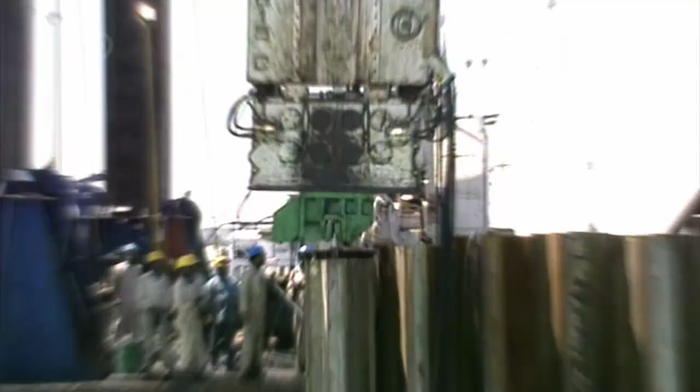Sheikh Mohammed bin Rashid Al Maktoum, Dubai's crown prince, is the visionary behind this amazing building. The project is his response to the economic time bomb his country confronts, as his close advisor, Sultan bin Sulayem, knows all too well.

He knew that we don't have oil. He knows that oil is going to end someday. And they have two choices. Either go and do something about it and find other alternative ways to sustain the life for the people of Dubai, or sit waiting for help.

Only 50 years ago, Dubai's a dusty backwater, home to pearl divers, coastal traders and Bedouin. Then, in the 1960s, prospectors discover oil. The sudden injection of billions of petrodollars transforms the sheikhdom. But geologists predict the oil boom will be over by 2016. The good life could end just as quickly as it began, when the wells run dry.

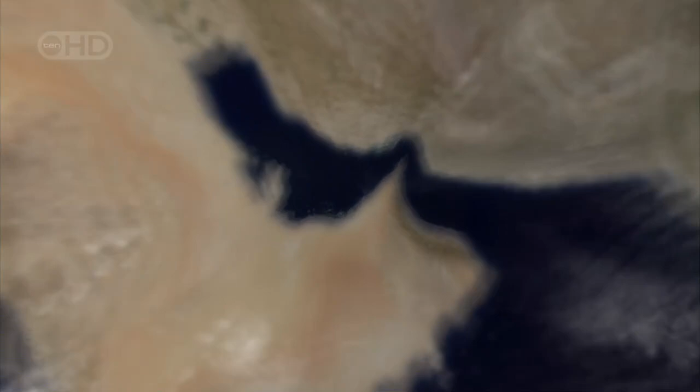The answer to Dubai's economic survival lies in its geography. This tiny emirate, less than twice the size of London, is in the remote Arabian Gulf. But Dubai has three untapped assets: sun, sand, and sea. Facing future economic meltdown, Sheikh Mohammed makes a crucial decision.

He will turn his country into one of the world's most exclusive holiday destinations, a playground for the rich on the Arabian Gulf Coast. The Sheikh needs a luxurious centerpiece to launch his country into high-end tourism. He stakes what some speculate as over $1 billion on the tallest, most lavish hotel in the world, with a unique 7-star reputation, the Burj Al Arab.

I think it was very important to put Dubai on the map of the world. There's no hotel like this hotel. It takes guts, and Sheikh Mohammed has a lot of guts. The Sheikh's courage is clear from his choice of architects. A radical young team from Britain, brave enough to take up the challenge, but very short on experience.

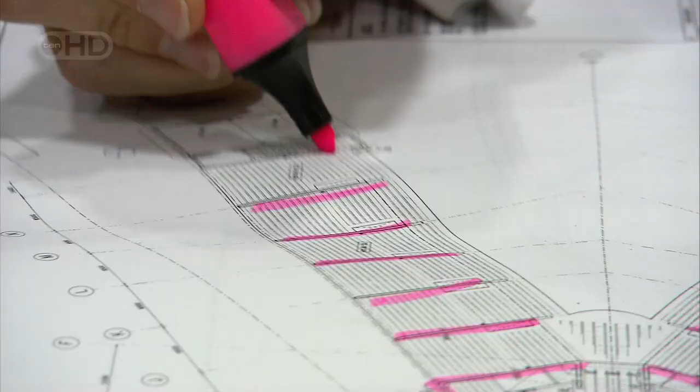They are led by Chief Architect Tom Wright. We had an average age of 32. Not a grey hair between us. And none of us had gone over about 15 stories. I was quite staggered by the scale and the immensity of the project. Tom Wright and his colleagues have a reputation for innovative engineering, but they're more used to designing schools and offices.

But Dubai is a place where connections can make all the difference. Through a contact in the ruler's office, the team gets its break. Sheikh Mohammed agrees to a meeting and is so impressed with their initial concepts, he awards them the contract. Now Wright must turn his sketches into a design so remarkable, the building becomes a world-renowned landmark. We had many sleepless nights worrying that the building we'd designed wouldn't turn out to be at all iconic.

Wright knows he must push his design to the limits. A building only becomes an icon when its form is simple but unique. We decided that if you could draw a building simply with a few strokes of a pen, and it was instantly recognizable as not only the building, but the place, Dubai in this case, you'd created something that was iconic.

So if you consider these buildings in the world, there are probably no more than 10 maximum that have actually achieved this status. Australia, Sydney Opera House. As with all these buildings, it's usually just the first couple of lines that actually make you know exactly where the building is. Paris. And you have to put a flag on the top. Can Tom Wright and his team compete with the likes of Gustav Eiffel? This is a once-in-a-lifetime challenge.

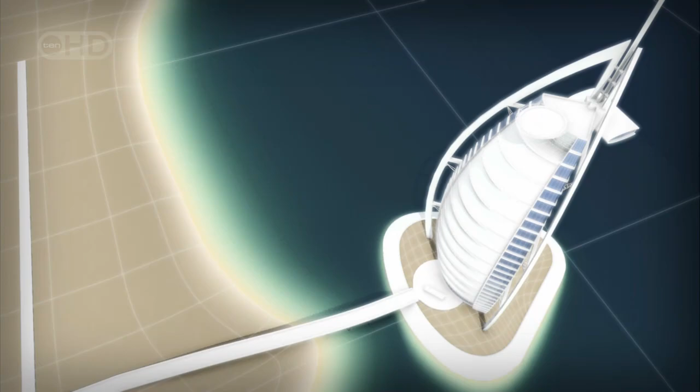Constructing the hotel out at sea will significantly add to the risk and cost. Can Wright persuade his colleagues this radical scheme will work? I remember I was pulling the sail out to sea, and the rest of the design team were pulling the sail back onto the shore. And this continued to go backwards and forwards before finally the client stepped in and said, no, it's going to be out at sea.

Sheikh Mohammed is prepared to take the risk. The hotel will be built 270 meters off the coast. No one has ever built a skyscraper this high on an artificial island. This 321-meter structure, weighing 250,000 tons, will need to stand firm against earthquakes and Gulf storms. Wright has won the first of many battles. The Burj will rise out of the sea. But time and again, his refusal to compromise will force his colleagues to push the boundaries of engineering to the limit.

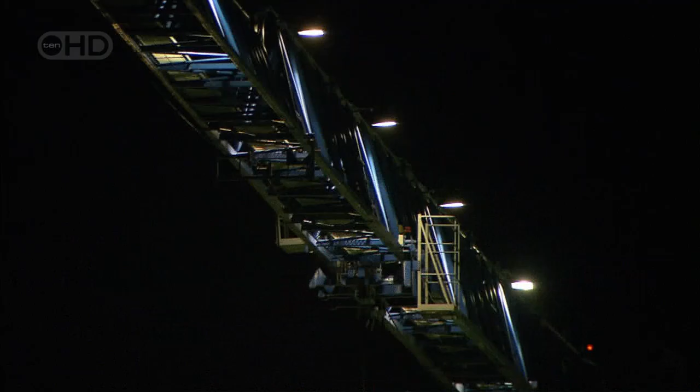By early 1995, the construction team is hard at work on Phase 1, building a low-lying island. But the inexperienced architects are about to get a taste of Dubai's extreme weather. April the 27th, a powerful storm known as a shamal sweeps across the Gulf, hitting the coast with a vengeance. A set of construction barges lie in its path. Each is laden with 10,000 tons of rock. The architects have planned for all weather conditions, but the storm's intensity still shocks Simon Crisp.

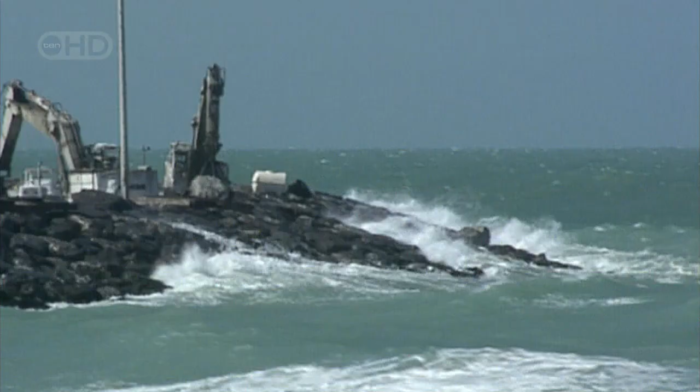We had 3 or 4 metre waves bashing onto the beach. To see the waves coming in like this was really quite a wake-up call for us. One huge barge breaks loose and slams into the mainland. The team realizes the damage this kind of storm could inflict on their island hotel. We had a really graphic example of how powerful the Gulf of Arabia can be when it's angry. The architect's decision to expose their structure to these forces could have serious consequences. The engineers will have to struggle to produce a low-lying island capable of resisting nature's fury.

The man-made island for the world's tallest hotel has hit a critical stage just 5 months into the build. Dubai's Sheikh Mohammed is depending on this project, the Burj Al Arab, to convert his country from oil producer to top-class tourist destination.

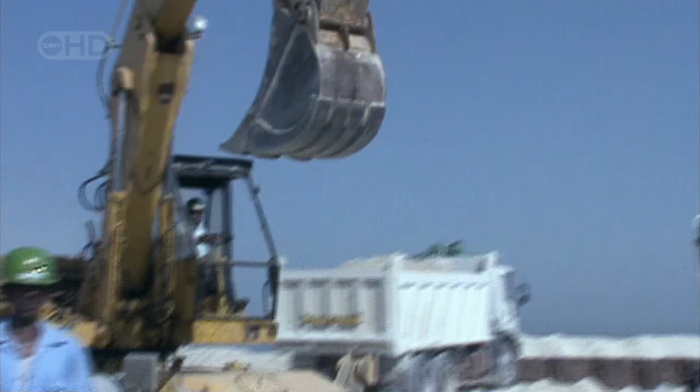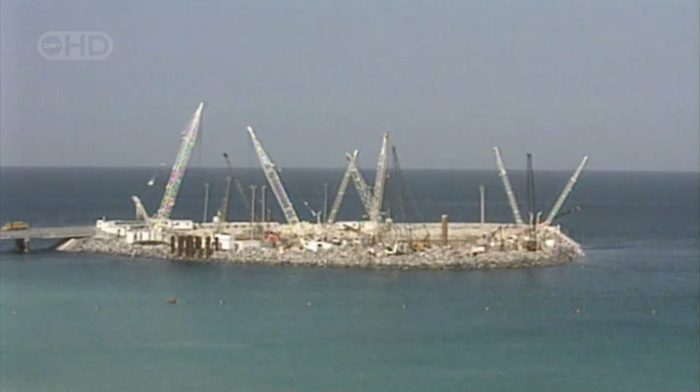But a debate rages over the island's height. Architect Tom Wright wants to make it low to give the impression of a sail rising out of the water. We argued a lot about the height of the island. From a design point of view, I wanted people to be close to the sea. From the start, he's gone head-to-head with engineer Mike McNicholas, who's responsible for the island's safety. So I wanted the island as low as you possibly could, you know, skimming the sea. I'm coming from the other end, needed to make sure we were protecting the island. McNicholas's worst fear is that waves breaking over the island could damage the hotel or even drag guests into the sea.

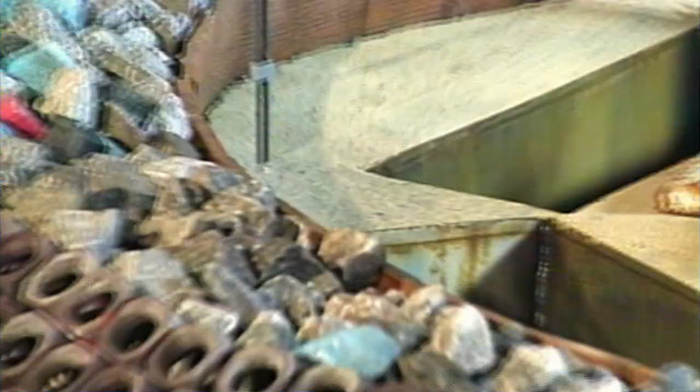Initially, the engineers planned to build the island using rocks. They are available locally and the technology is proven. But Wright rejects this. A rock island would have to be far too large to repel the sea safely. To keep the island low, McNicholas experiments with pioneering concrete blocks designed to reduce the impact of waves. But no one in the Gulf has ever used these blocks before. I had to insist with the team that we carried out tank testing. It was the only way we were going to be sure that the island would be safe. These tests replicate the power of the tallest waves that can occur once in 100 years and send them crashing into a series of differently configured models.

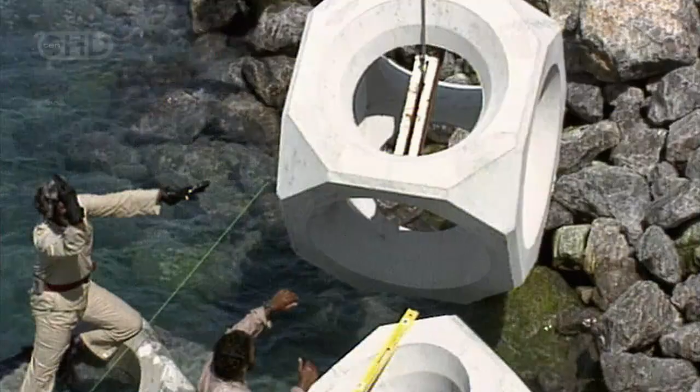3 weeks of testing prove the hollow blocks will work. The construction team builds the island with steep rock slopes, then covers them in concrete armor to absorb the force of the waves. These ingenious blocks work like a sponge. As the wave hits, the water passes inside the space and turns around on itself. The force is largely dissipated. With the engineers' help, architect Tom Wright has won his battle for a secure island that rises only 7.5 meters above the waves.

Now the team begins the second stage of construction. In the center of the island, construction workers drive huge lengths of steel 20 meters into the ground. This creates a triangular steel wall known as a cofferdam, which will become the outside of the hotel basement once they excavate the sand from inside.

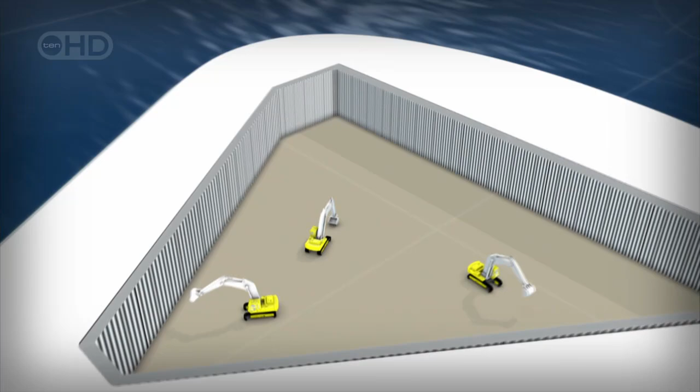But removing the sand could be dangerous. That was a real challenge for us. It's sleepless days and nights, 7 days a week. How we were going to stop the seawater coming into the structure, how we were going to stop the seawater coming around our structure from beneath and flooding it.

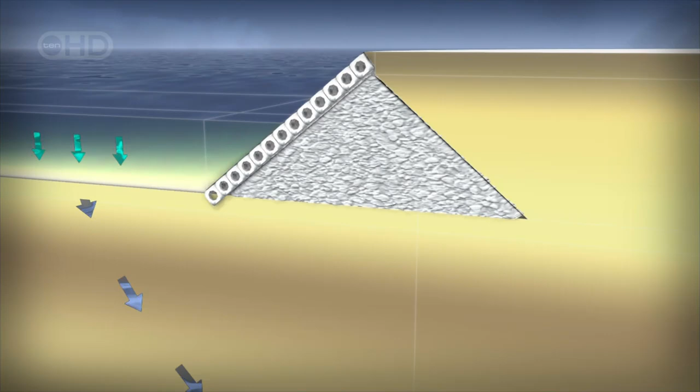The weight of the sea is a huge force on its bed. This pressure forces water through the sand and threatens to flood the artificial island from beneath. To keep the sea out, McNicholas injects liquid cement into the sand to seal off his steel wall from below. But as the sand is removed to form the basement, there's less and less weight to hold back the force of the sea. The cement seal is going to be tested to the limit.

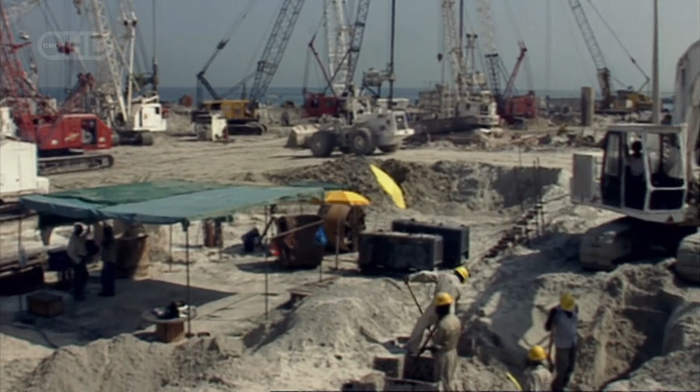In the worst case, the pressure caused by that water movement could have blown the whole bottom of the excavation like a champagne cork. If McNicholas's calculations are wrong, the excavation could be swamped, killing hundreds of workers. But he stands by his design. With the cement seal in place, the excavators begin to remove the sand.

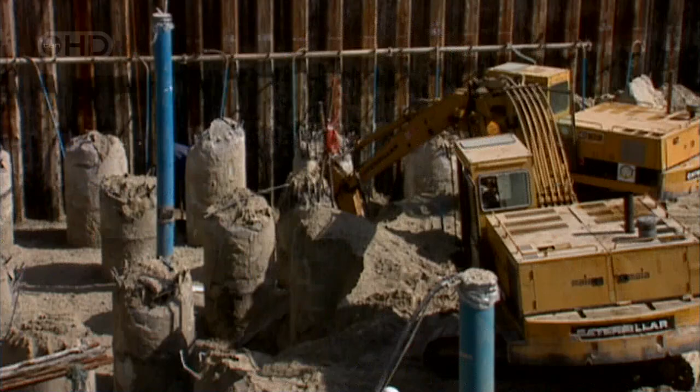As the man responsible, he's not going to let the workers face the risk alone. I felt I had to be one of the first guys down at the bottom of the excavation, looking up 10 meters above myself, thinking, each side of this cofferdam is 7,500 tons of sea pressure pushing in. When put to the test, both wall and seal hold firm.

And one of the probably proudest moments of my career was being stood on that excavation and looking around and seeing the steel wall there surrounding me and thinking, we are holding back the sea. My design worked.

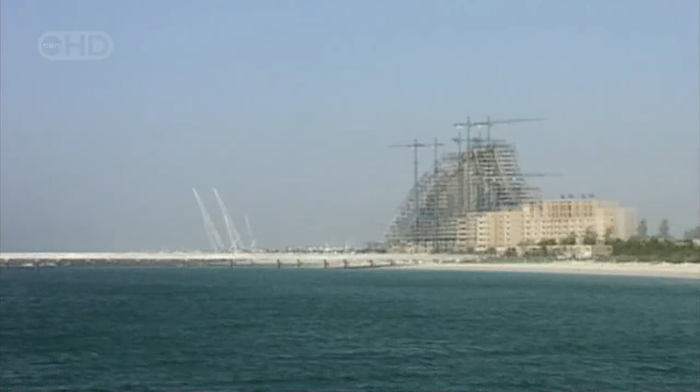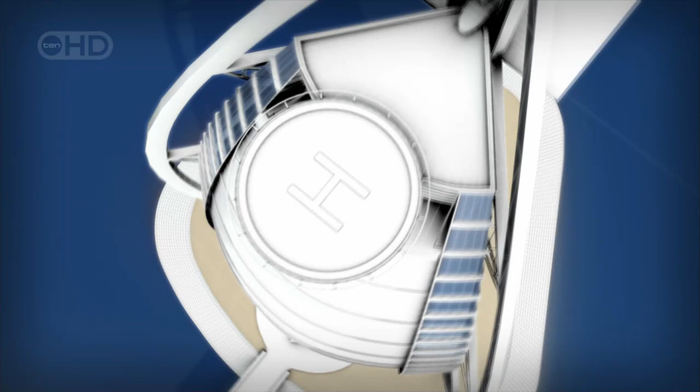November 1995. The artificial island for the tallest all-suite hotel in the world is now complete. The construction team starts phase 3 of this one-off project, the foundations. The support needed for any skyscraper is vast. But the location of the Burj Al Arab presents an added challenge. It had never been done before to build something like this on reclaimed land. I mean, we're talking about a 300-metre high tower on a man-made island in 6 metres of the Arabian Gulf.

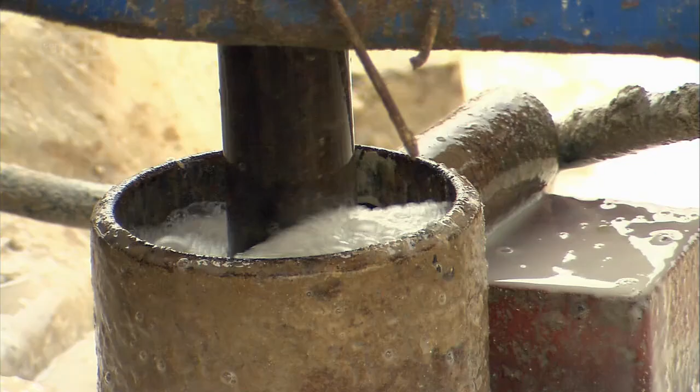The problems multiply when the results of earlier core tests reveal bad news. The team searching for bedrock drilled deep into the seabed. But even a full 180 meters down, there was no solid rock. This will make their job tougher, but the architects remain defiant. The average person would think we're crazy to build something like this on sand, let alone out in the water. How will this 300-meter structure stand firm against earthquakes and winds of close to 150 kilometers an hour when its foundations depend on nothing more substantial than sand?

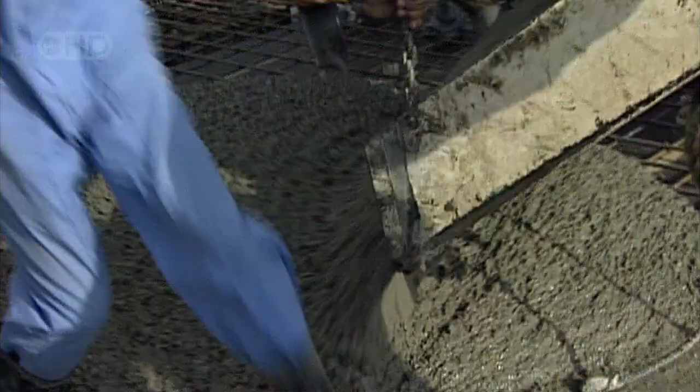On an artificial island 280 meters off the coast of Dubai, construction workers are preparing the ground for the tallest hotel in the world, the Burj Al Arab. But there's no bedrock beneath the site to support the foundations for a skyscraper. The architects have a plan. They want to support the Burj using steel-reinforced concrete foundation piles drilled deep into the sand. So, what's to stop the whole structure from just sinking?

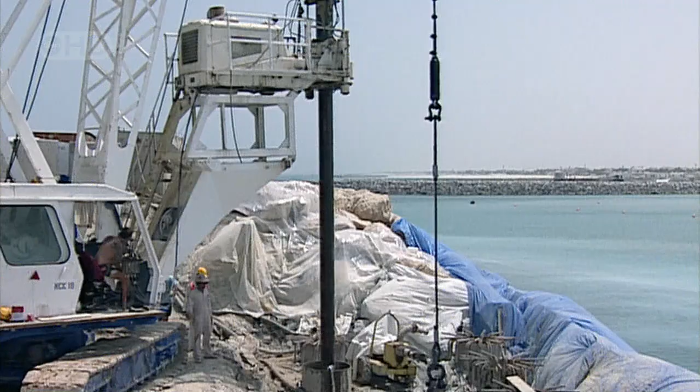They are relying on an effect known as skin friction, the resistance that stops two rough surfaces slipping past each other. Skin friction is all about the contact between the sand and the surface of the pile. And the longer the pile, the further in the ground it is, the greater that effect. And I'm going to demonstrate it now by whacking it in.

You'll see it starts to move quite quickly with the first few impacts. Now it's starting to stiffen up a bit, even though I'm not hitting it any harder or any softer, and the skin effect is starting to really kick in here. Once the friction between the post and the sand around it equals the load of the hammer, the post comes to a halt.

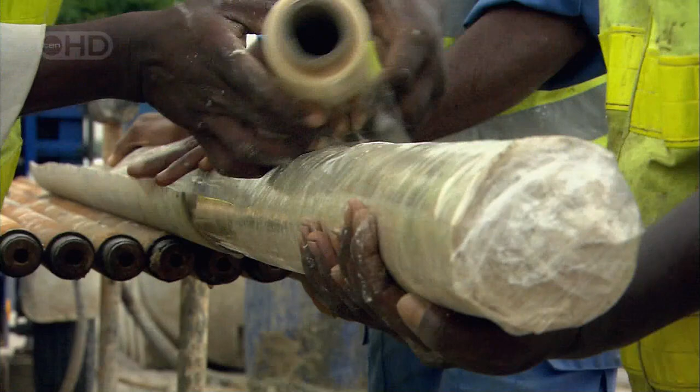The scheme will only anchor the Burj if the sand is compacted enough to create resistance around the building's piles. The drillers pack sand samples into sealed containers and send them off to be analyzed. If the results show the sand is too loose, then support on the piles anchoring the building could suddenly fail.

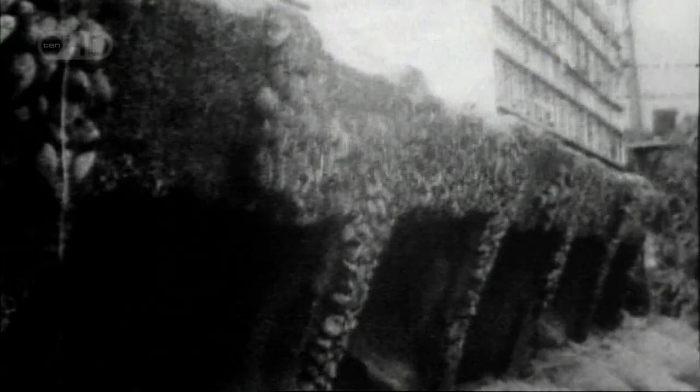The geography of Dubai gives everyone reason for concern. It lies within range of a major fault line, so this soaring megastructure could be vulnerable to earthquakes. In June 1964, a 7.5 magnitude earthquake hits Niigata in northern Japan. Because the area is built on sandy silt, the tremors flip over entire apartment buildings. This isn't normal earthquake collapse. It's a devastating phenomenon known as liquefaction.

As grains of loose sand shake, they fill up any air pockets and compact, taking up less space. The ground stops behaving like solid earth and acts like a liquid. On shifting sand, any building could simply topple. When the results of the drilling tests return, it's good news. Deep beneath the site, they find compacted and calcified sand. Liquefaction is not a threat.

But will the foundations be long enough for the skin friction to hold them firm? We weren't going to take any chances, and we extended the piles by another 8 meters. CRISP specifies foundations over 20% longer than originally planned. These 250 concrete piles have a combined length of 10 kilometers, 35 times as long as the towering hotel they will support.

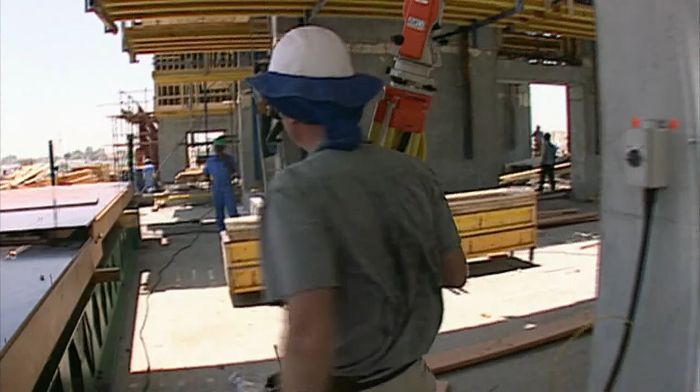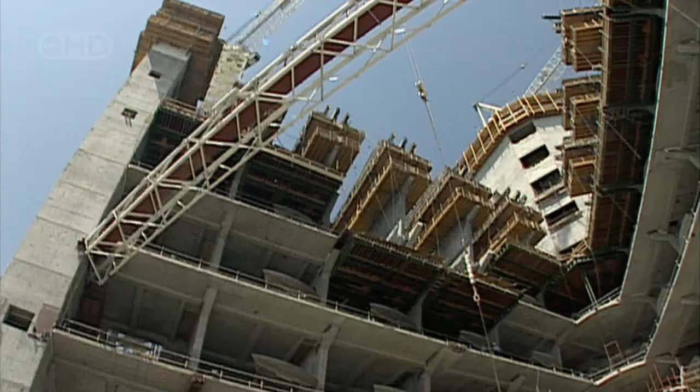One by one, the engineers are solving the challenges thrown up by this extraordinary structure. But in 1996, they brace themselves for a new set of obstacles as Phase 4, the construction of the hotel itself, begins. This building had to stand up to the worst that the Gulf could throw at it. The hotel itself has slender concrete walls, not capable of withstanding the elements alone.

To hold them firm against high winds and earthquakes, the architect devises a visually stunning solution. A gigantic steel structure outside the main building, known as an exoskeleton. A series of vast diagonal trusses tie two huge steel bows to the concrete core at the back of the building. Wright's design will make the building unique. But his giant diagonal trusses will make life hell for Anthony McCarter, the engineer who has to make them work.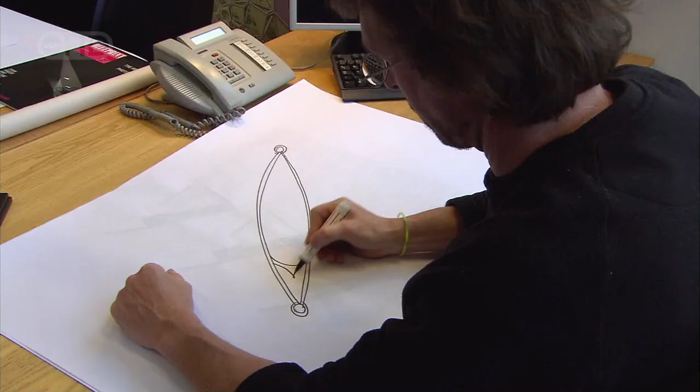Those trusses gave me 4 months of heartache, sleepless nights, worries, anxiety. They must be incredibly strong to tie the exoskeleton together. But aesthetics are just as vital. It was critical that these diagonals were very, very elegant and also very beautiful as they're so visible. This building has to wow the world and make Dubai a must-stop destination. Wright's not about to compromise.

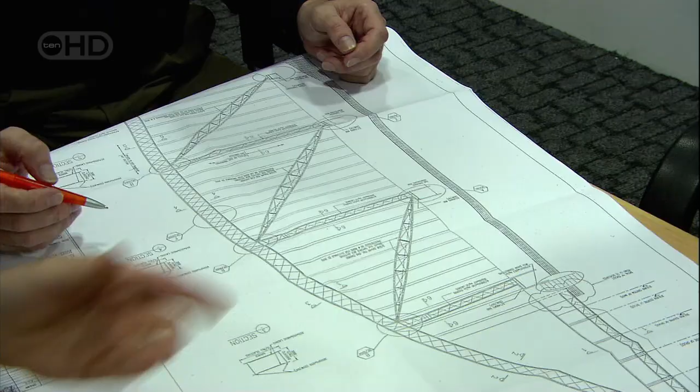I used to go to Tom with option after option. I remember one particular occasion where I had 7 options and he went, no good, no good, no good. Eventually, McCarter finds a form that works structurally and is graceful enough to fit Wright's vision. But this in turn causes nightmares for Malcolm Murphy, the chief contractor. It's okay for the architect to draw pretty pictures, but we have to build it.

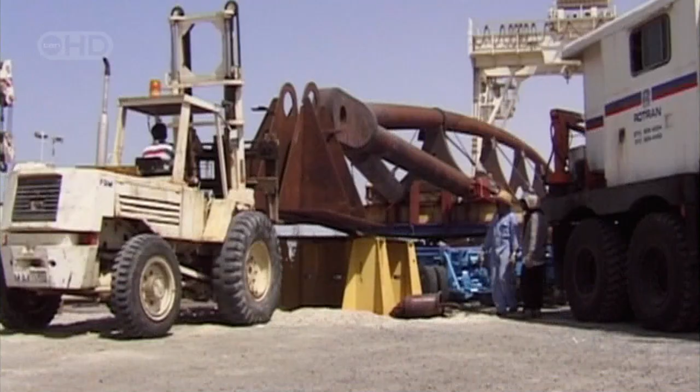He finds a factory just 15 kilometers from the construction site capable of welding the huge diagonals. Each one is longer than the Airbus A380 Super Jumbo and heavier than 20 double-decker buses. Welding these complex forms in the factory is the easy part. Transporting them to the site is not. With each truss weighing in at 165 tons and reaching a staggering 85 meters in length, it's no easy task. And the challenges to do that are just unbelievable.

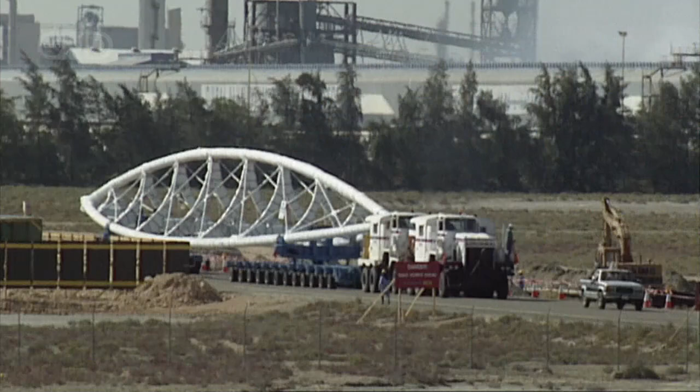No one has ever transported anything this size before in Dubai, but Murphy's not going to be beaten. He brings in one of the world's largest heavy lift transporters, a beast with a total of 80 wheels. It makes the slow journey to the construction site at an average speed of around 6 kilometers an hour. Police must close roads and remove traffic lights to allow this convoy through. When they finally reach the site, the contractors face their next hurdle. These 165-ton beasts have to be lifted into position.

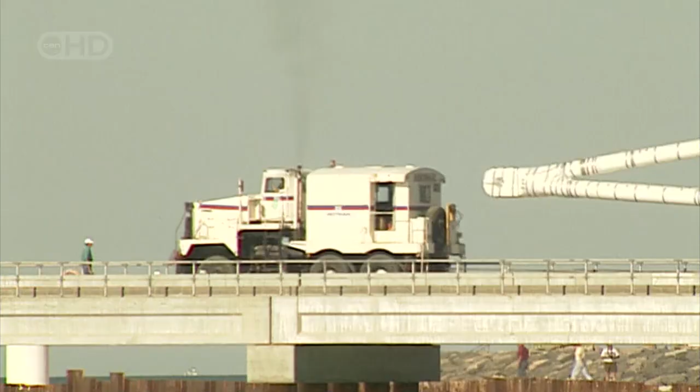The architects refused us point blank to position these things in 3 pieces, which we wanted to do originally. And he said, no, aesthetics, I'll not let you weld up there. He has to find a way to lift the trusses in a single piece to a height of almost 200 meters, twice the height of the Statue of Liberty. We had to go away and think of an idea how to actually lift these monsters up. We had 3 big monster cranes in there, and even they weren't big enough to lift the diagonal trusses.

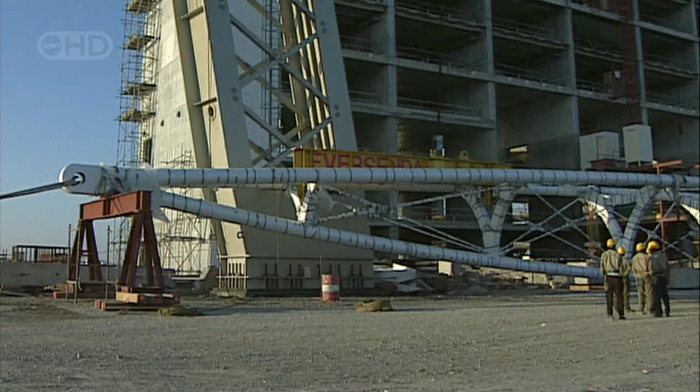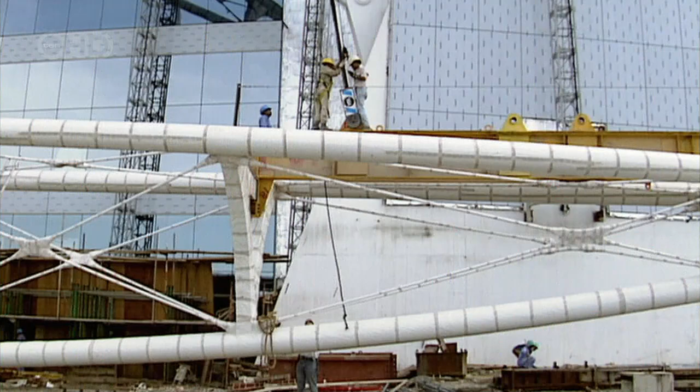Murphy must look further afield for a solution and brings in specialist lifting gear from Singapore. His team sets up winches, like those used on offshore drilling rigs, high on cantilever frames 15 meters from the building. Cables with a breaking strength of 225 tons are attached to the end of the truss. I can assure you we were very, very nervous that morning when we lifted the first one. 30 or 40 guys had sleepless nights that week, getting ready for that first lift.

The 2 massive winches take up the strain and then painstakingly raise the diagonal truss little by little up the side of the building. It's all going to plan. Murphy and his team have solved the lifting dilemma. But these trusses have a sting in the tail. They need to fit into place with pinpoint accuracy.

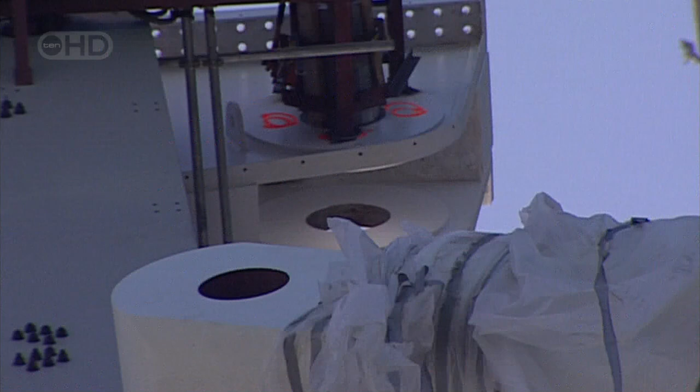But Dubai's climate means temperatures can vary by as much as 14 degrees in a single day. And this will make the trusses expand and contract dramatically. The problem's known as thermal expansion. The steelman's nightmare in the desert, working 50 degrees C. Steel expands in the heat and contracts when cold.

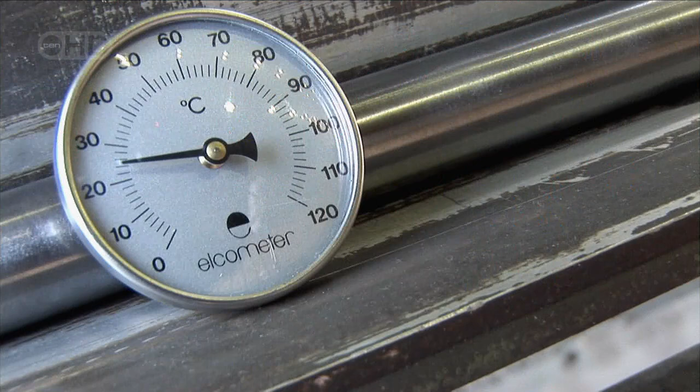Okay, chaps, light up. We're actually going to heat the steel up now, which is going to give you an idea of what temperatures we're working in the desert. Heat makes the steel molecules move faster and further. And this 15-meter tube actually grows in length. The difference is visible. What did I tell you? Steel does expand with the heat.

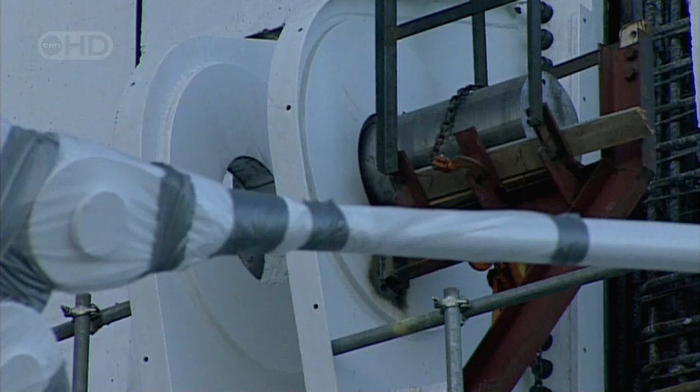The diagonal trusses on the Burj Al Arab could expand and contract by a full 5 centimeters over a 24-hour period. They will never fit their precise point in the framework without an ingenious solution. The engineers thought about it, the structural fabricators, the steel fabricators, the architects, everybody thought about it. And it was actually one of the architects who came up with this great solution.

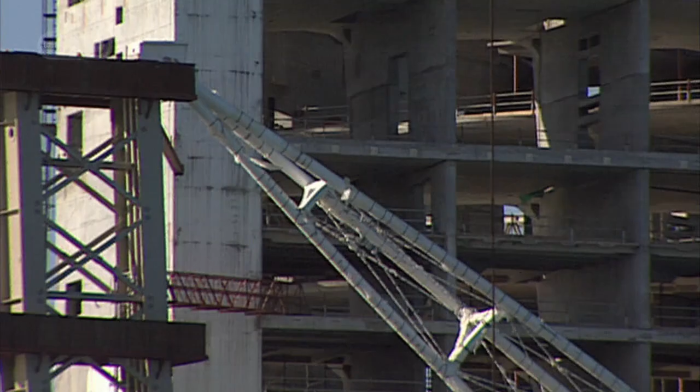On the frame of the structure, the fixing bracket contains a vast washer with its hole offset from the center. This swivels until it lines up with the hole in the diagonal truss. Then, the cast steel pin, about 30 centimeters in diameter, is inserted through both holes, locking them together. This clever device buys the team the crucial 5 centimeters of play they require for the installation, and the truss is now fixed securely in place.

When we got that pin in, we had those champagne corks flying. It was just unbelievable. But there's precious little time for celebration. The first VIP guests will arrive before the millennium. This leaves the team less than 36 months to complete the entire project. Sheikh Mohammed's vision for the Burj Al Arab meant that it was needed yesterday.

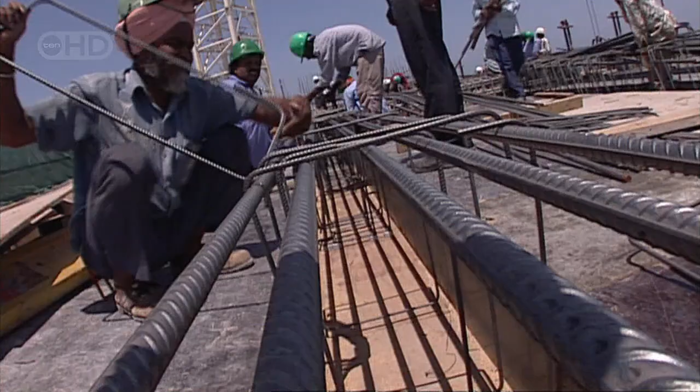January 1997. A colossus is emerging out of the Arabian Gulf. The Burj Al Arab is to be the tallest hotel in the world, the last word in luxury and a proud symbol for Dubai. Architect Tom Wright wants the building to be beautiful. The steel sections of the exoskeleton that will support it must be as minimal as possible. The view from these $2,000 a night suites will have to live up to the price tag. When you're in the suite, looking through the windows, they are right in front of you. So they have to be exceptionally well detailed and well put together.

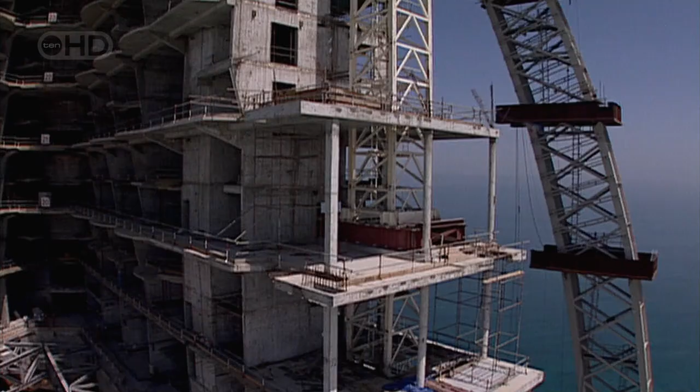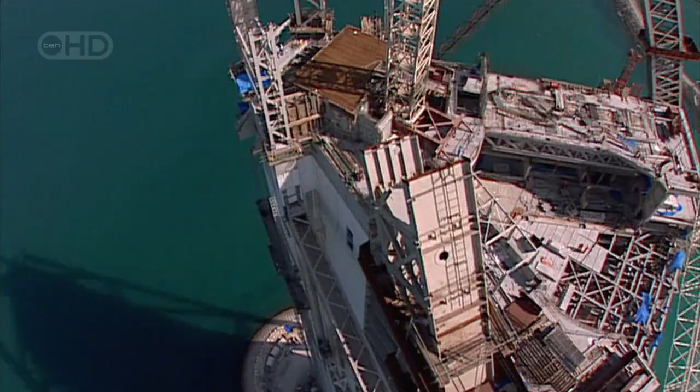But this creates a dilemma. If Wright makes the exoskeleton too light, the wind's force at 300 meters above the Gulf could shake the building apart. Too bulky, and the elegant form of his yacht-shaped structure is ruined. Once again, Wright and the engineers, who must make his hotel safe, are on a collision course. When you're designing a building that is taller than the Eiffel Tower, and you've never done one before, you want to make sure that you've got it right. This structure is so unusual. For the first time in Dubai's history, engineers decide to do tests in a wind tunnel.

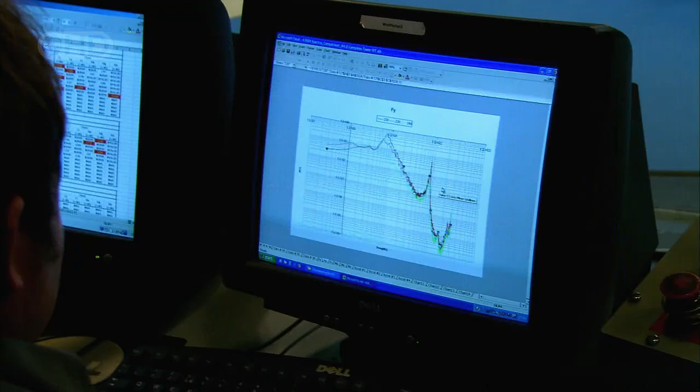Wind engineer Volker Buttgereit knows the Burj Al Arab is one of a kind. Before this building came along, most of the buildings in the Gulf were fairly orthodox in shape. They were square, they were rectangular, they were nowhere near this scale. So doing a wind tunnel test for a building in those days in the Gulf was almost outrageous. But for this extraordinary structure, it's essential. The wind tunnel simulates the wind effects of the Gulf around this 1:50 scale model.

This building has seen some pretty severe loads, almost twice what it would see in London. We measured suctions which were of the order of the weight of a car hanging off, trying to suck the panel off the building. So that's quite something. The wind tunnel throws up results that could threaten the entire exoskeleton. When we first saw the design, there was immediate concern about vibration due to something called vortex shedding.

Vortex shedding is an engineer's nightmare. Certain wind conditions blowing over sharp edges on the steel structure can create miniature tornadoes. These set up dangerous vibrations that can shake a building to destruction. Which is exactly what happened to these massive cooling towers in Ferrybridge, Northern England in 1965. The engineers must find a way to protect the Burj Al Arab.

The simplest solution is to change the aerodynamic shape, but that upsets the architect. The architectural idea of the exoskeleton structure is, when you look at it, the very essence of the building. If you take it off, it's just another building. If you put the exoskeleton structure on, you know, you have an icon.

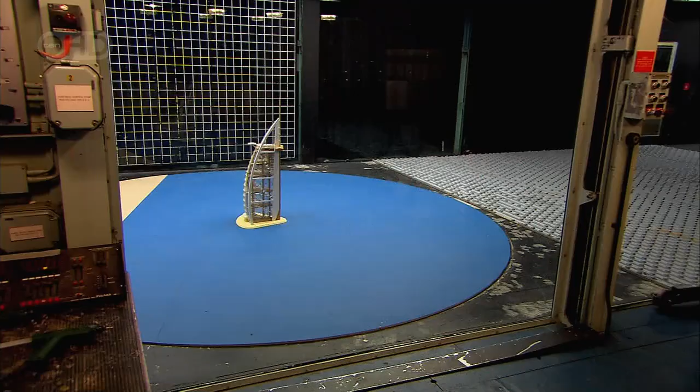The engineers need to think again. This is classic vortex shedding. We realized we had to come up with something clever that was not visible, but somehow reduced the motion. They turn to an ingenious hanging weight called a tuned mass damper. These are installed at vulnerable points in the exoskeleton.

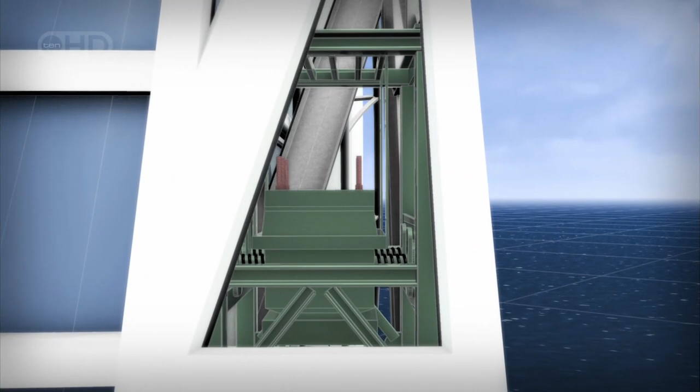When the wind blows and vortex shedding starts to create dangerous vibrations, the 5-ton weight will swing instead of the structure and damp down the vibrations to well within safety limits. 11 of these systems are fitted from the top of the 60-meter mast all the way down through each of the steel bow structures. These dampers safely cancel out the threat.

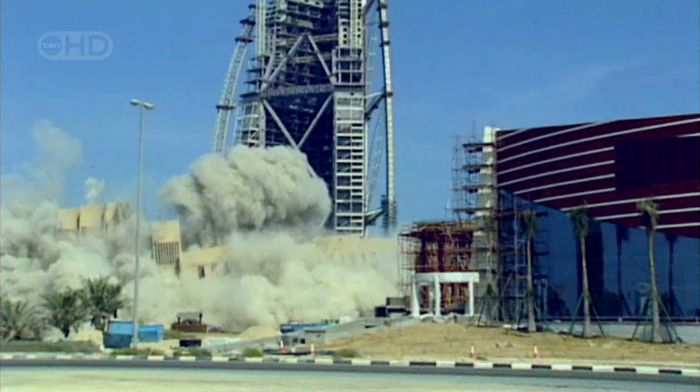June 1997. Dubai is reinventing itself as the luxury tourist destination. This old hotel bites the dust as the Burj Al Arab, the symbol of the new Dubai, approaches its final form. Just 30 months before the deadline, the crew begins constructing the toughest engineering challenge.

Sheikh Mohammed wants the building to amaze, so the design calls for a restaurant that looks as if it's suspended in the sky. I like the idea of the visitor sitting out in space, looking across the view towards the Arabian Gulf and Dubai, and sort of almost floating up in the clouds. The whole idea of hanging out over space would give you a dining experience pretty unparalleled. The Al Muntaha, or Ultimate Sky View Restaurant, will soar 200 meters above the sea and project nearly 27 meters out on both sides from the building's narrow central core.

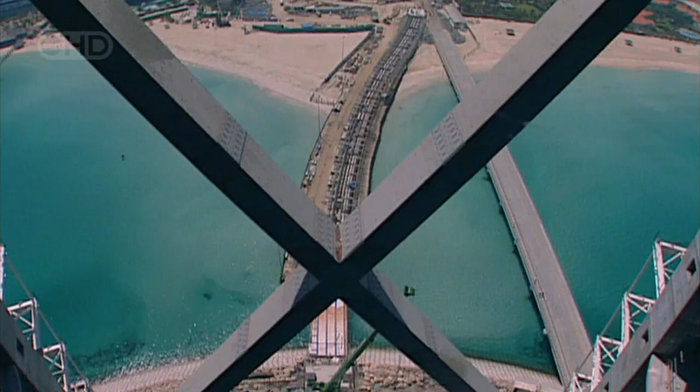Once again, Wright's throwing down a gauntlet to structural engineer Anthony McCarter. Can he secure this eccentric wing-like structure with no visible means of support? When Tom first showed it to me, I must admit I thought it was crazy. This room is actually the size of most buildings, and Tom decided that he wanted to take it and stick it outside of the centre of gravity of the supporting structure. So there it was, dangling in the breeze with only the structural engineer to hold it up. And if the engineers get the calculations wrong, the whole thing could tumble 200 meters to Earth.

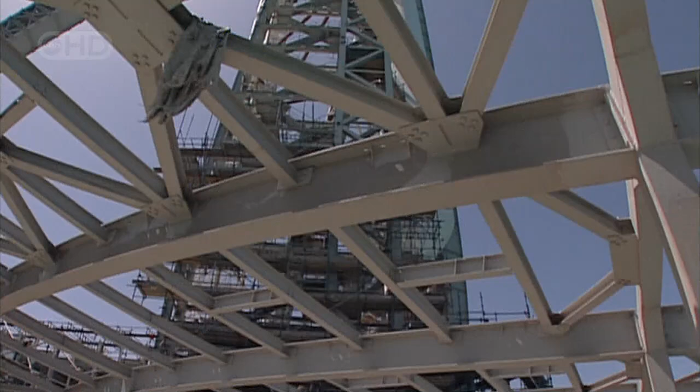McCarter finds a solution to the pull of gravity that pushes conventional engineering to new heights. In the concrete core at the back of the building, he casts a series of steel brackets known as embedments. 10 enormous steel girders radiate off them up to 1.6 meters high. These beams form the base of the rigid steel floor. The wing-like exterior can be attached to it, and then the entire restaurant is enclosed in aluminium and glass. This gravity-defying structure will survive winds of close to 160 kilometers an hour. It's an engineering triumph.

But they are just 4 years into the 6-year program. No one can afford to take their foot off the gas. The program was relentless and challenging. 24-hour working, 6 o'clock site meetings in the morning, every morning. You live, sleep, breathe the building. The challenge really was on, can we design it and finish it by the original program?

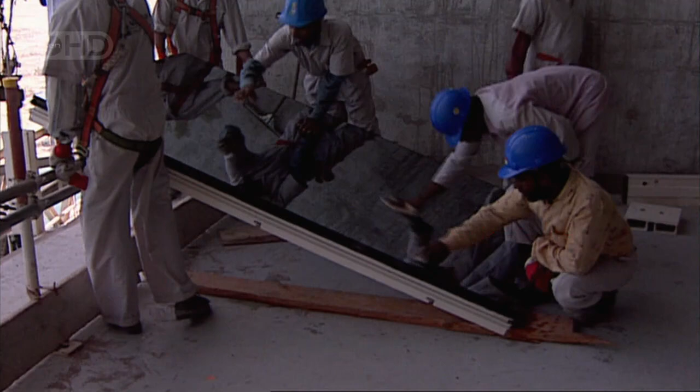The Burj Al Arab is due to open in time to celebrate the millennium, just 2 years away. The world's media are watching to see if the hotel will be the masterpiece the Sheikh promises, and if the team can complete it on schedule. The only way to deliver on time is to start the interior decoration long before the exterior is finished.

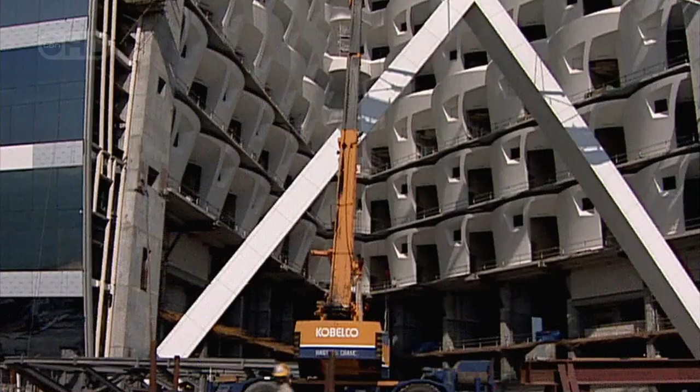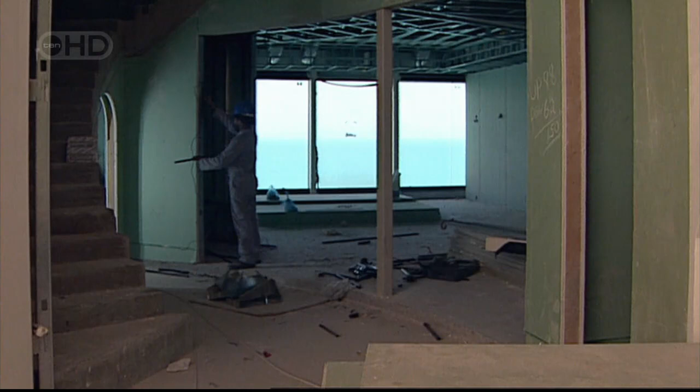In a temperate climate, this wouldn't be an issue, but humidity in Dubai reaches 100%, and temperatures can soar to a scorching 49 degrees. These conditions simply won't allow the team to fit delicate finishes like gold leaf, silk, and carved wood. If we'd started to put materials that were susceptible to moisture at that time, they would have just fallen apart. To make the deadline, the contractors need to air condition this giant building site and bring the temperature down dramatically.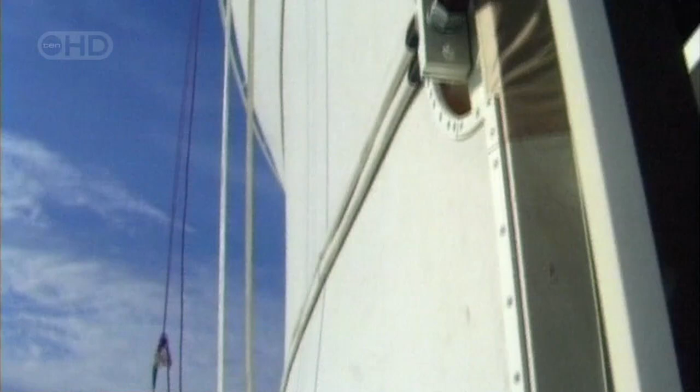The first step is to enclose the building by installing the final wall, Wright's iconic white sail. But it's going to be tough. When we first proposed the idea of the fabric sail wall, there was a lot of skepticism. People thought that it couldn't be done. They stretch woven glass fiber sections between huge horizontal beams. The surface is pre-coated with Teflon to resist dirt and sand.

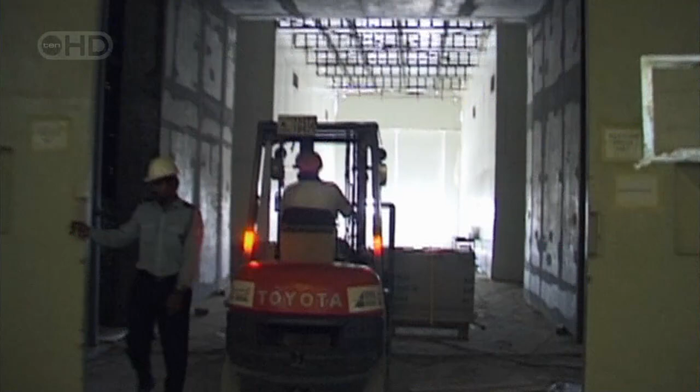The result notches up another first for the Burj, the largest fabric wall anywhere in the world. The reflective properties of the white sail will help keep the temperature down. But the contractors still need to find a way for trucks to enter the building without allowing in the desert heat. The solution is to install a huge airlock.

Trucks drive in, the vehicle pauses as the doors close behind it. A second set of doors then open, and the vehicle moves out of the building. The airlock and the sail wall now seal off the building. But cooling a space this large during construction could create a major setback.

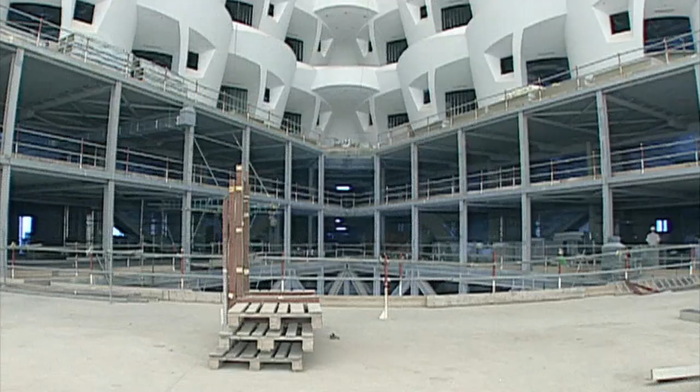This unique structure now boasts the world's largest atrium, soaring to an amazing 180 meters. All this warm air can hold far more water vapor than cold air. If they cool this hot, humid environment too quickly, they will create uncontrollable condensation. We could have had a rain cloud form at the top of the atrium and create massive damage to the interior design. The only way to avoid rain clouds will cost valuable time.

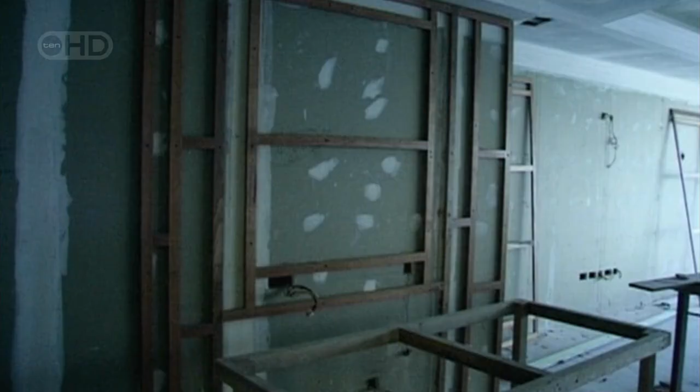The contractors switch on the giant cooling system and bring the interior temperature down steadily by less than 1 degree a day. Given the schedule, it's painfully slow. We started to cool the building down in June 1998. By December 98, it was pretty well down to temperature. At last, the interior decoration can begin. But the hunt for a designer who can create interiors worthy of a sheikh causes further delays.

Khuan Chew, who's already worked for the Sultan of Brunei, knows exactly what it takes to satisfy royalty. It's great news when she agrees to take on the most luxurious hotel on the planet, with its daunting 202 palatial suites and the 180-meter atrium. But she has just 24 months from design to completion to be ready for the guests booked in for the millennium. I had a very, very tight program.

So what we did was that the entire office, all 50 designers, just dropped everything else. And solidly, we just worked on the Burj Al Arab. She not only faces a frantic schedule, Sheikh Mohammed is expecting her to amaze the world. The brief basically asked us to design something that's never been designed before, and that will never be designed ever again.

Khuan Chew and her team pull out all the stops and begin to produce interiors they hope will match the Sheikh's ambition. But as they struggle to meet the deadline, another more severe problem comes up. The Sheikh wants to offer guests every conceivable electronic gadget in their suite. This new requirement could have dangerous consequences. A new member of the team is suddenly in the hot seat. Electrical engineer Rob Roos faces the biggest challenge of his career.

There was a total redesign or a total change in the interior design, and that imposed overnight almost a 50% increase in the electrical load of the building. The Sheikh's new plans mean each suite requires an enormous 14 kilowatts. That's 8 times the load of a normal European house for every suite. With 202 suites, that's roughly enough electricity for a town of over 6,000 people.

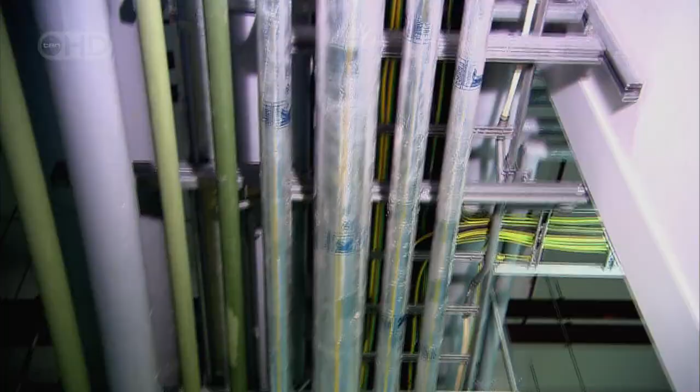The hotel will have electric curtains throughout, 52,000 lights, most of them on dimmers, and over 5,000 kilometers of electric cable. All these electronics can scramble the waveform of the electric current and create a problem known as harmonic distortion. This can melt the sheathing around live cables and cause a raging fire. That was a situation which was just totally unacceptable. We had to deal with that.

The people of Las Vegas know just how lethal a hotel fire can be. November 1980. In the city's MGM Grand Hotel, a pair of electrical wires short-circuit. This causes a blaze that wreaks destruction. 85 people perish in this real-life towering inferno, and over 700 are injured. It's one of the worst hotel fires in history, all caused by a simple electrical fault.

Roos needs a solution to the fire risk, and fast. Obviously, the hotel was under construction. There were some fairly heavy deadlines to try and get the hotel finished and opened, and this was a major change. His response takes electrical engineering to a new level. He devises a harmonic filter system.

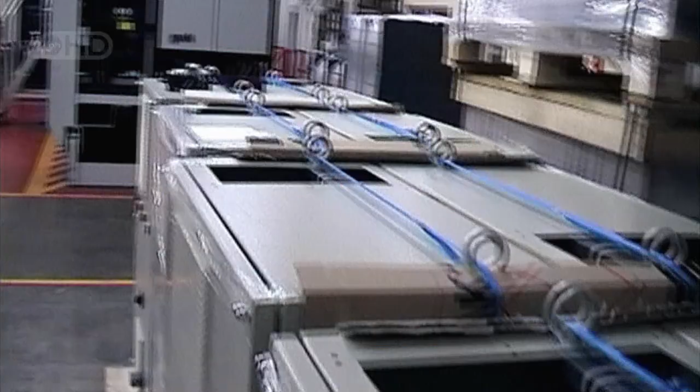First, it detects the electronic distortion, then it sends a current that's the mirror image to cancel it. It's called antiphase and works like noise-cancelling headphones. He installs his filters on key floors, and at the point the electricity enters the building. No one has ever attempted a system on this scale before. This was the largest active filter installation of its kind in a building like this anywhere in the world. A world-class solution for a world-class megastructure.

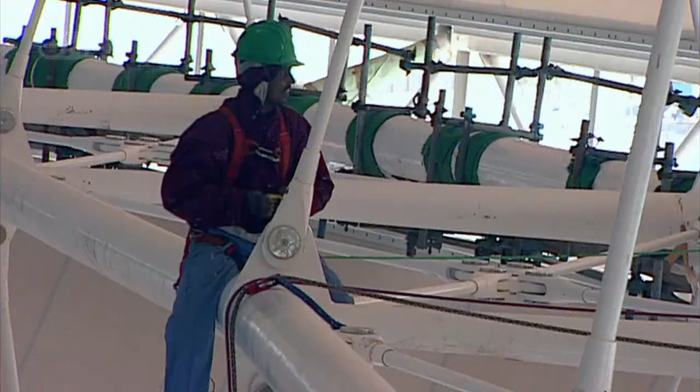The team constructing the Burj Al Arab can claim a string of groundbreaking achievements. They build the first artificial island off the coast of Dubai, construct the tallest atrium in the world, enclosed by the largest fabric wall ever built. And with the mast finally in place, this structure, for now at least, is taller than any other hotel on the planet.

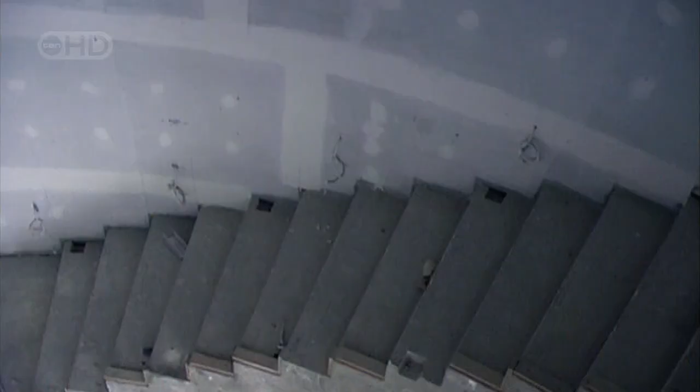Now, 5 years into the project, the team reaches an important milestone. The iconic exterior is almost complete, but the interior decoration of the world's most luxurious hotel is seriously behind schedule. This stage has always been a race against time. Now Sheikh Mohammed is about to send the design team into a tailspin.

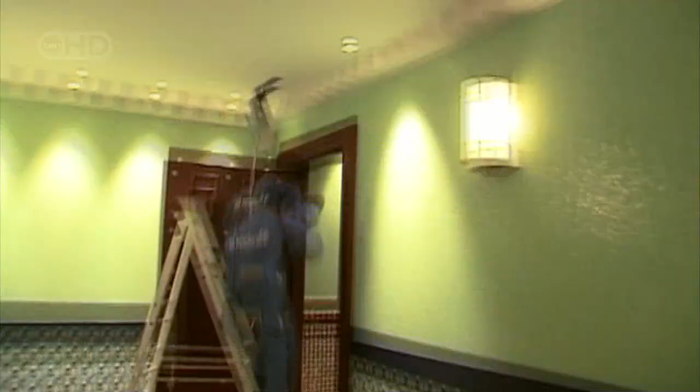Dubai, April 1999. The world's tallest and most opulent hotel is approaching completion. Everyone is rushing to finish the hotel, ready for the Millennium deadline. Interior designer Khuan Chew is still operating in overdrive. Christmas was cancelled, Easter was cancelled, bank holidays were cancelled. We basically made 50, 60-hour weeks.

Her brief from the Sheikh is to shock, to innovate, to amaze the guests with a modern Arab palace. And she delivers in spades with over 24,000 square meters of marble from Italy and Brazil, the equivalent of nearly 3 soccer pitches. Over 8,000 square meters of 22-carat gold leaf give the desired impression of luxury. And she completes the appearance of total indulgence with crystal chandeliers, woven silver and velvet.

But for the world's largest atrium, Khuan Chew makes a radical decision. She goes minimalist. She lets the complex architecture speak for itself by painting it all white. The interior decoration is almost back on schedule. Then comes the moment of truth. Sheikh Mohammed arrives to examine her work and pass judgment. The man behind the whole project is delighted with the ornate styling of the luxury suites. But that's where the good news ends.

I was summoned and said, when are you finishing off this atrium? I said, well, it's nearly done. Unfortunately, the feedback was no, where's the color? The Sheikh completely rejects the white styling of the atrium. It's just too plain. Not exciting enough, not bright enough, not colorful enough, not rich enough.

Khuan Chew has to completely redesign and decorate the tallest atrium in the world in just 6 months. I was basically living and sleeping in the Burj, rushing from area to area. This is her last chance to get it right, so she sets out to dazzle. She designs a light show to animate the world's tallest fabric wall.

Fountains create aqua gymnastics in the lobby. Vast fish tanks welcome visitors as they ride the escalators. And crucially, she transforms the view up the atrium into a rainbow palette of vibrant colors. Will it satisfy Sheikh Mohammed? Everyone's on tenterhooks. The adrenaline was pumping, you know, sleepless nights basically before opening.